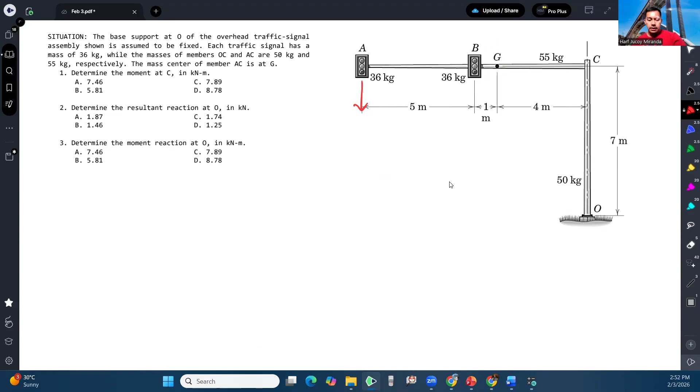Then this one also has weight, the weight of B is 36 times 9.81. And then the weight of AC, it's here. This is for OC, and this is for AC, 55 times 9.81. And OC is standing, so somewhere here in the middle.

Okay, so the weight of OC is 50 times 9.81. So like that. Okay, so now for the first question, we are asked: what would be the moment at C?

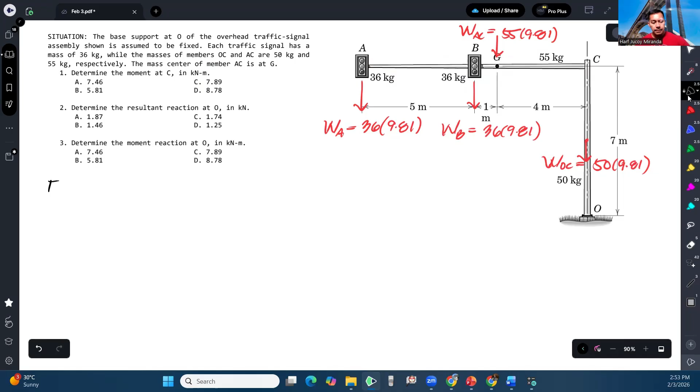Method of members or method of sections, wherein we can detach a certain section of the structure anytime. So let's detach member ABC. Let's draw the free body diagram of member ABC.

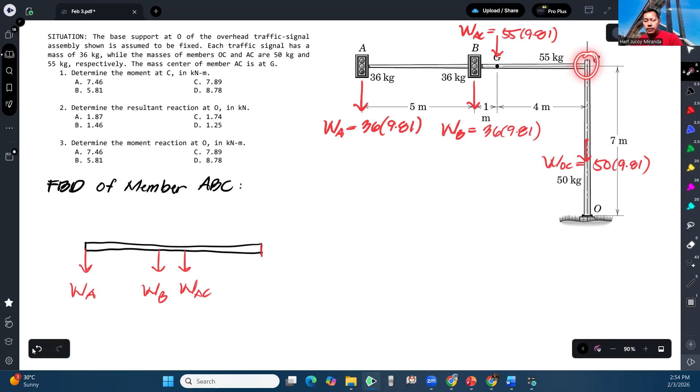So when nothing is specified, we will automatically assume that connection is a fixed connection, because this is a structure, right? So it's a fixed connection, and because of that we idealize this as a fixed support. And because of that, there's a reaction here at C.

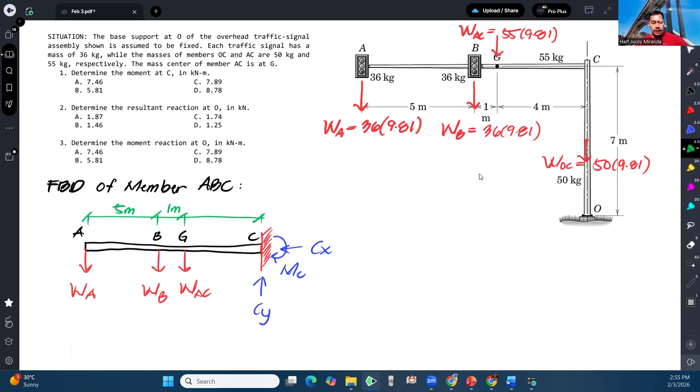Okay, then there are distances, right? So let me add the distances. This is 5 meters, 1 meter, and 4 meters. So now let's take the summation of moments at C equal to 0, assuming counterclockwise to be positive. So we have WA, and the moment arm of WA from C is this: 5 plus 1 plus 4, so that's 10.

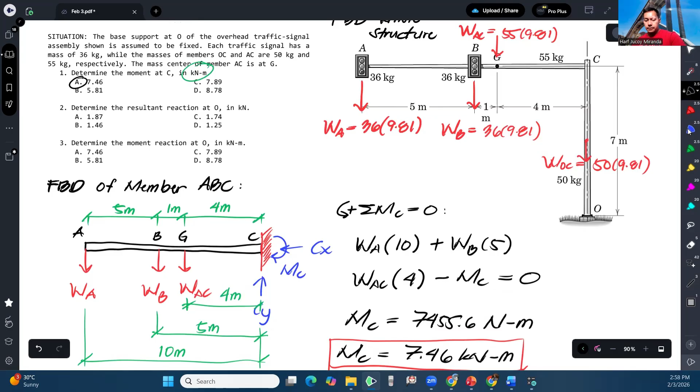This is it, this is the free body diagram of the whole structure. So to complete the free body diagram of the whole structure, since this is a fixed support, that means there's a vertical reaction, a horizontal reaction, and also a moment reaction here.

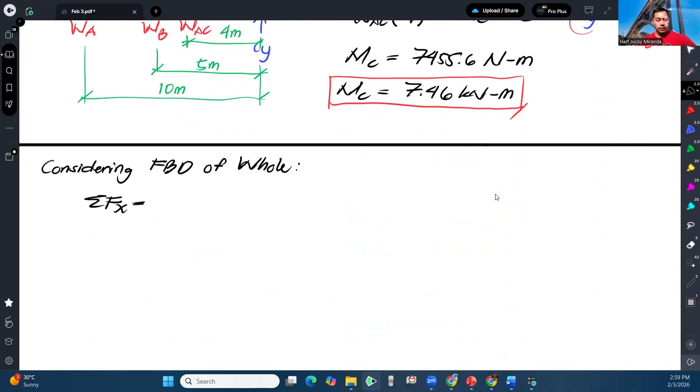So let me write this down: considering the FBD of the whole structure. I will take summation of forces X equal to 0, and it turns out that OX is equal to 0. Why? Because there are no other horizontal forces acting on the structure — everything is downward, so there's nothing to counteract it. So the value is 0.

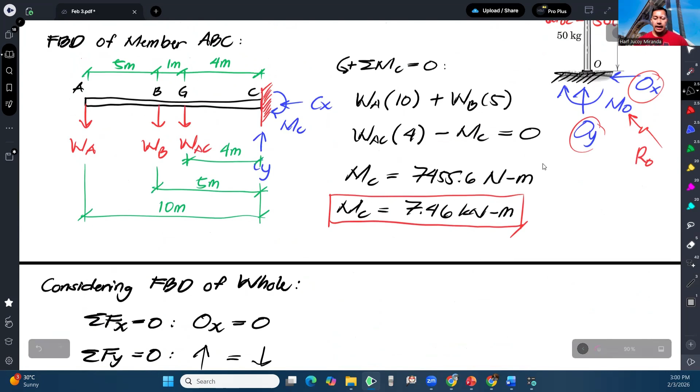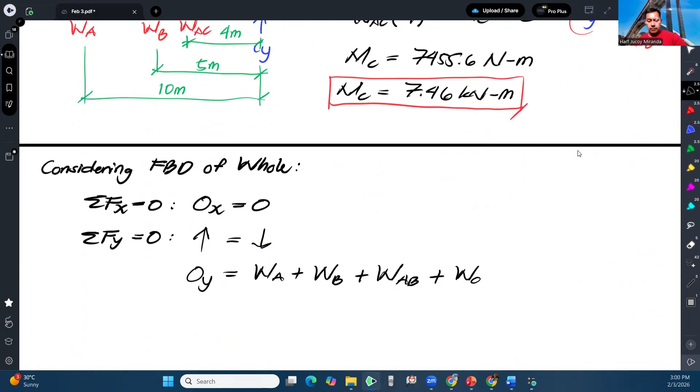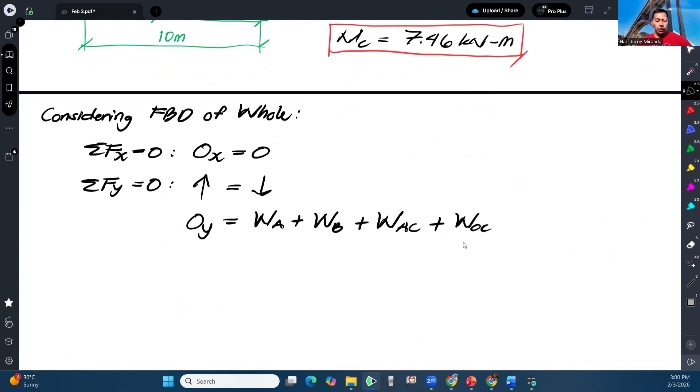So what are all the upward forces? I assumed OY is upward. What are the downward forces? Actually, all of these are downward — this one, and this one, and AC. So in short, OY is just the summation of all the weights. Let's add them all: the total weight is 36, 36 plus 36 plus 55 plus 50.

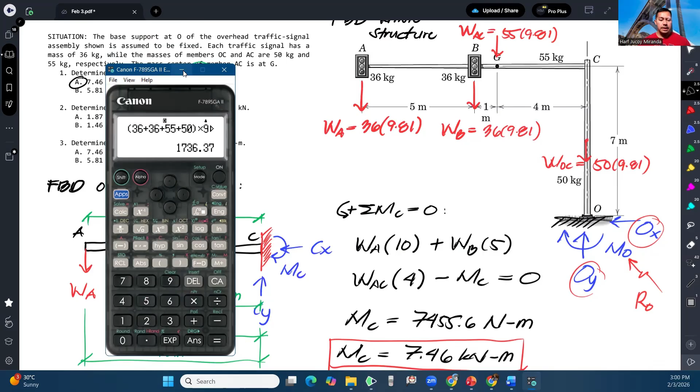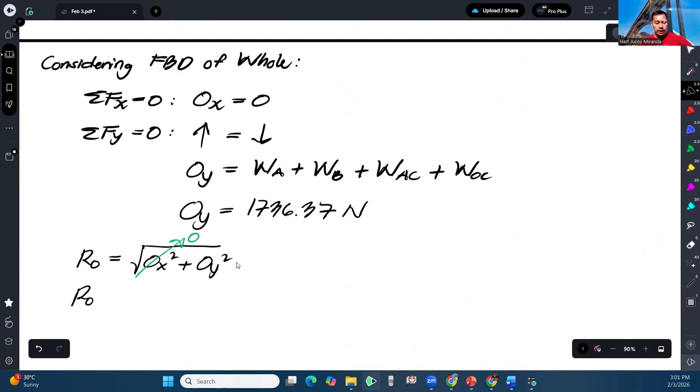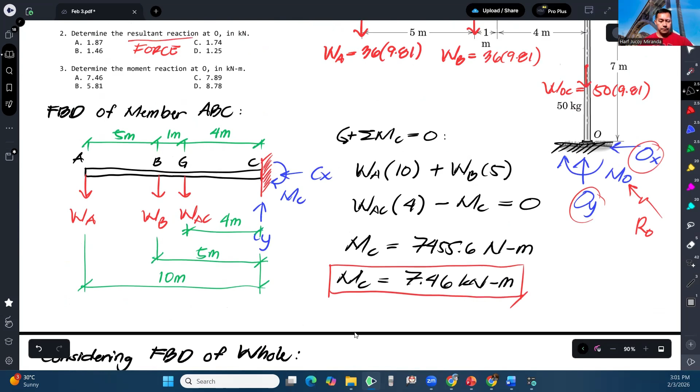So to get the resultant RO, it should supposedly be the square root of OX squared plus OY squared. But since OX is 0, the total reaction at O just ends up equal to OY, which is 1736.37, or in kilonewtons, 1.74 kilonewtons. That's our answer — 1.74.

Lastly, determine the moment reaction at O in kilonewton-meters. So this is what we need to find now. Let's do it again — we'll take moment about O, considering this entire structure. Look carefully.

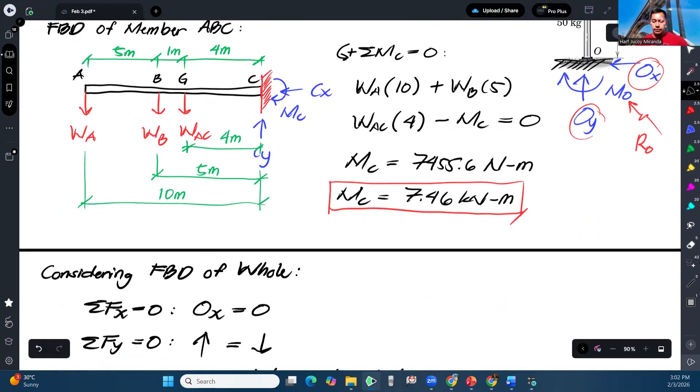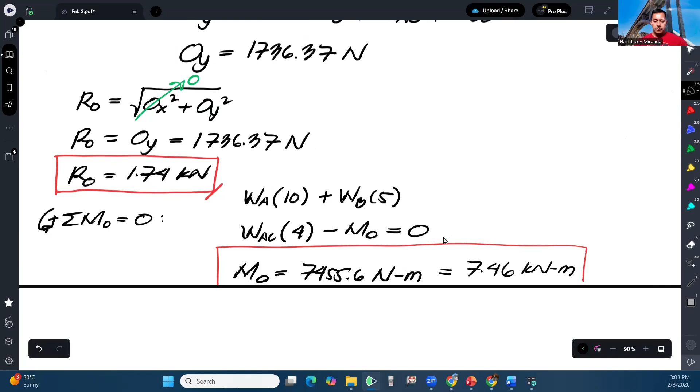The only difference is this is moment about O, which comes out to 7.46 kilonewton-meters. So our answer for number 3 is letter A. And that's how we solve this problem.